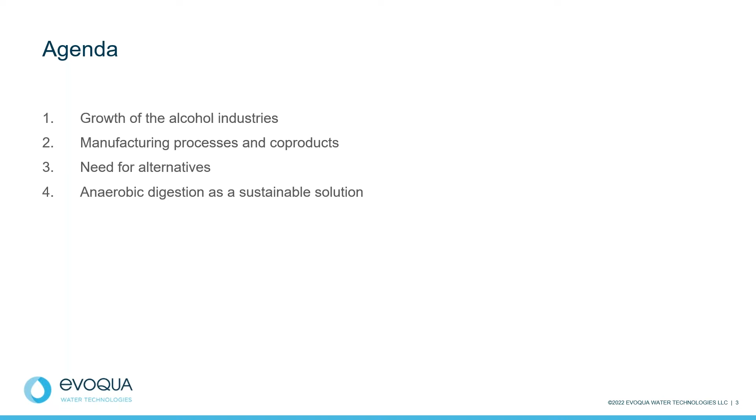So talking about sustainability, we'll jump in here with the need for alternatives. And more specifically, we want to discuss the use of anaerobic digestion as a sustainable solution for handling some of those waste products, waste streams, whether they're solids or liquids.

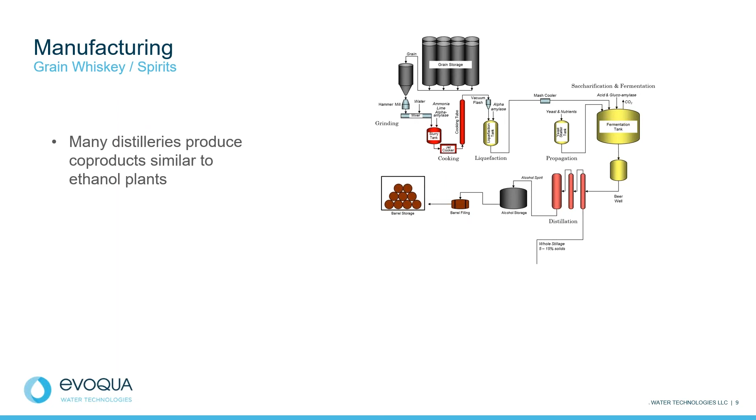But if you're in the middle of a city, it's not always so easy to have a tanker truck fleet to move the stillage out of the city to the farms. And depending on where you're located, sometimes there's not enough demand for this feed ingredient to utilize all the stillage. All right, let's jump to the next slide, please.

So composition wise, if we're looking at the various options for concentration, distillers wet grains or DWG, oftentimes you'll see larger distilleries separating the suspended solids. And what you're going to see is on a dry matter basis, that material, depending on what the cereal grain is, can be up to 45% or more protein content, which is really fantastic as a cattle feed. The problem with distillers' wet grains, because it's a wet product, we're really talking about somewhere between 55 and 65% moisture content.

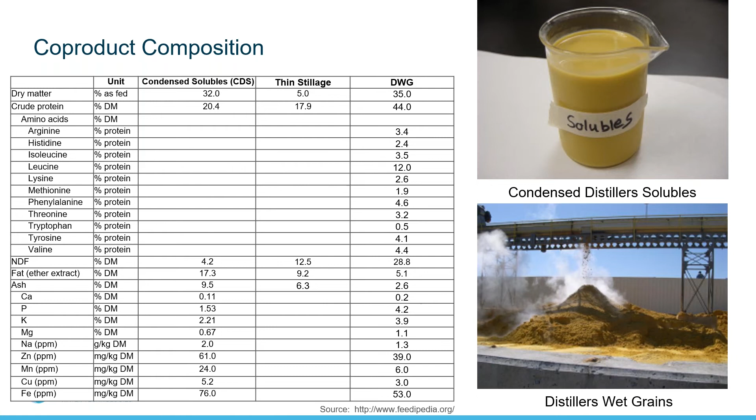It really has a very short shelf life, and most distilleries are going to find that the wet grains won't last for more than a week before they become too moldy for use by animals. But what you're going to notice in this slide, they're going to be really high in neutral detergent fiber, NDF. Here you see almost 29%. Going to be high in leucine, high in some minerals as well. Let's go to the next slide.

If you dry the wet cake, the distiller's wet grains, down, you'll generally produce some type of a distiller's dried grains. It might have solubles or not, the dried dissolved solids. Typically speaking, we're going to see protein concentrations from about 25 to about 35% on a dry basis. We're going to see a fairly high fiber content on a dry basis as well.

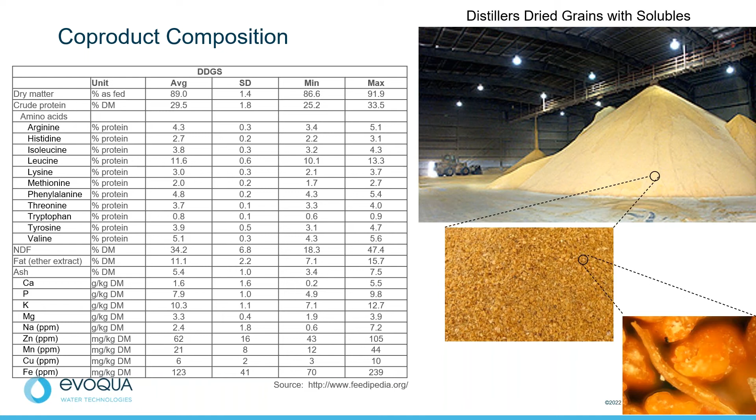And depending on the completion of your fermentation, we'll see generally somewhere between 5 and 30% starch content, depending on your fermentation operations. This has a shelf life that could be anywhere up to a couple of years or more, because generally the moisture content is going to be less than 10%, and so it's shelf stable. Let's go to the next slide, please.

If we think about malt whiskey production, it's a little bit different than your grain-in types of beverage production. So in this case, we have a grain-out fermentation where we mash the grain, we extract as much of the sugar as we can, we send the solubilized sugars into the fermentation, and all of that spent grain then leaves the mash tun as draff.

And sometimes you'll run that through a centrifuge. Sometimes companies won't. They may sell their draff wet, or if they run it through a dryer, they may sell distillers dark grains, in many respects similar to what a grain-in type of fermentation will provide. With the sugar stream, grain-out fermentation, we may have pot ale, we may have spent lees as well. Not all of the fermentation will go to completeness. So there may be some other streams that we have to deal with.

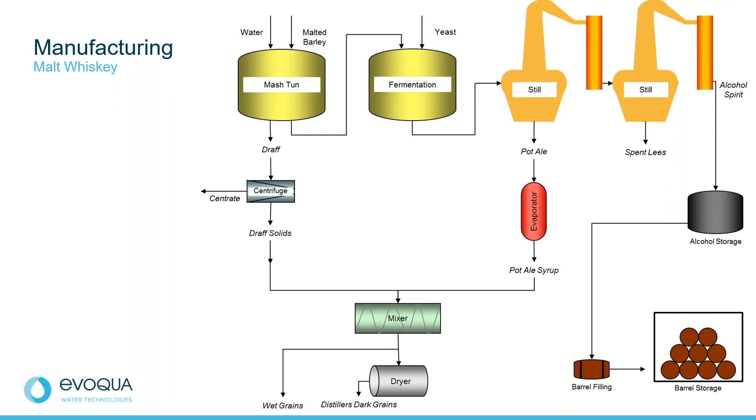And again, what many of the smaller distilleries are doing is not necessarily drying these down into dried grains. That's generally the larger distilleries that do this. Generally, the small and the craft scale distilleries are utilizing the city systems to deal with their wastewater streams.

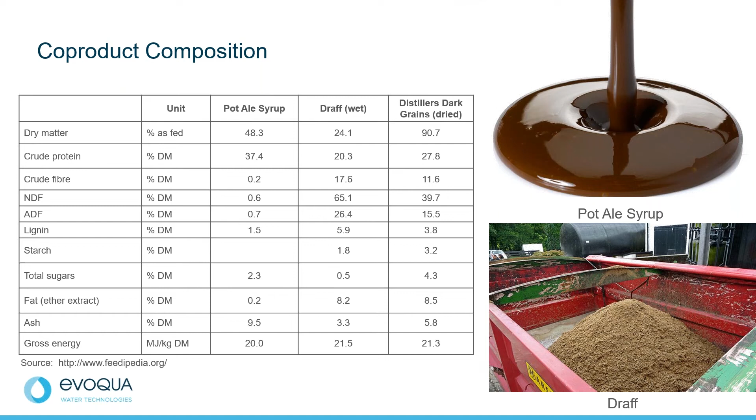Next slide, please. If we look at the composition on a dry basis, what we're going to see is some similarities with the grain-in fermentations. So generally, looking at the draff or the wet grain, similar to DWG, about 20% protein on a dry basis. Distillers dark grains, which are dried, will get a little bit closer to 30%. These will follow and track, in many respects, the cereal grain that you use. If you're using more rye and corn, or if you're using just corn, the nutrients will change just a little bit. So let's go to the next slide, please.

So from a beer processing point of view, in many respects, there's a lot of similarity to a malt whiskey type of production where we do a mashing step. We try to remove as much of the solubilized sugars as we can so we can run those through the fermentation. So the spent grains that are going to be coming out of our lauter tun or a mash tun are going to be very similar in many respects to what we see from a malt whiskey type of production. Again, there may be some lees or some pot ale that we might be removing from fermentation, but not always. So the spent grain is in many respects going to be quite similar to what you'd see from a malt whiskey production. Let's go to the next slide, please.

And if we look at typical composition for brewer spent grains, depending on the scale of operation, the smaller and the medium-sized breweries are typically going to have their byproducts in wet form. Some of the larger breweries have installed dryers and they produce dry spent grains. But on a dry basis, we're really talking anywhere from 20 to over 30% protein.

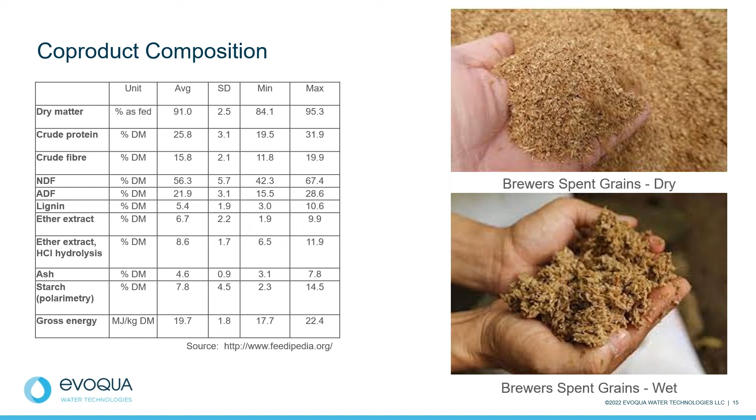So very similar to what you'll see from a malt whiskey type of production, because it follows the same type of sugar extraction process. So the other nutrients, the ash, the lipids, the fiber, those will all track with the type of cereal grain that you're using. Again, depending on the extraction of that sugar from the endosperm of that grain, you may have more or less residual starch left in that spent grain. Next slide, please.

So when we think about the growth of the beverage industry, whether it's spirits or beer, what we're really talking about is growth in byproducts. And I think it's really important to consider the byproduct side when you're talking about sustainability, both the environmental, the economic, as well as the social aspects, the triple bottom line. So if you make an estimation, and this is just a crude estimation, that for every gallon of alcohol that you produce, whether it's beer, whiskey, vodka, somewhere between 8 and 15 gallons of stillage per gallon of alcohol.

What we're seeing really, if you go back a few slides to the growth charts that I showed you, no, sorry, Jose, I didn't mean to go back. From 2012 to 2017, really what we're talking about is a growth of about 42 million liters of spirits in the US, which is essentially the growth of about 420 million liters of stillage and spent grains. So there's a lot of byproducts that our industries need to deal with, and there's no magic bullet.

Separating your solids, drying your solids, sending them to cattle yards, swine and poultry production facilities, those work, and they work very well, especially for the fuel ethanol industry. But you have to have a scale with which you can afford to install the separation and drying equipment. For the craft and the medium scale breweries and distilleries, they don't always have the capital to afford that.

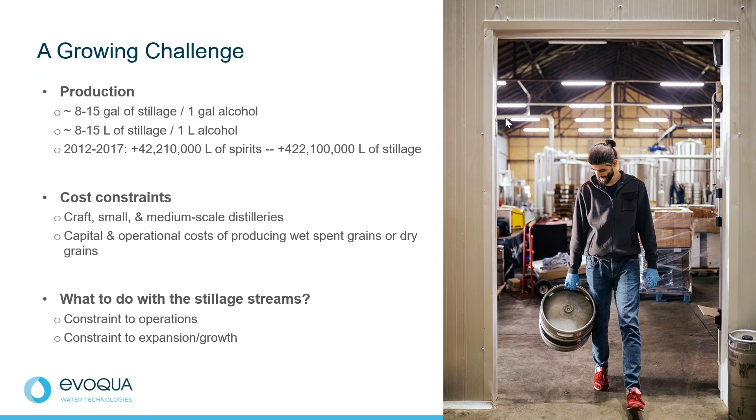So the challenge that we have, especially from a sustainability point of view, how do you deal with these products? Yes, there's a lot of nutrient value, but if you can't afford to install centrifuges and dryers, what do you do? And if the city is no longer allowing you to increase your load to the municipal system, that's going to be a constraint to the growth of your operations. So I'd like to hand it over to Jose to talk about anaerobic digestion as one potential option for breweries and distilleries that may work better for some of the smaller scale companies.

Well, thank you, Kurt, for that discussion. So this is a great way to summarize what's going on in the distillery industry. So on the one hand, you have production of alcohol. On the other hand, you have all those elements that you have to deal with after you've made your alcohol. There's the byproducts, there's the liquid streams, there's the solid streams. And again, the discussion here is how do we do this in a more sustainable fashion? And like Kurt said, we're not talking about just an environmentally sustainable way.

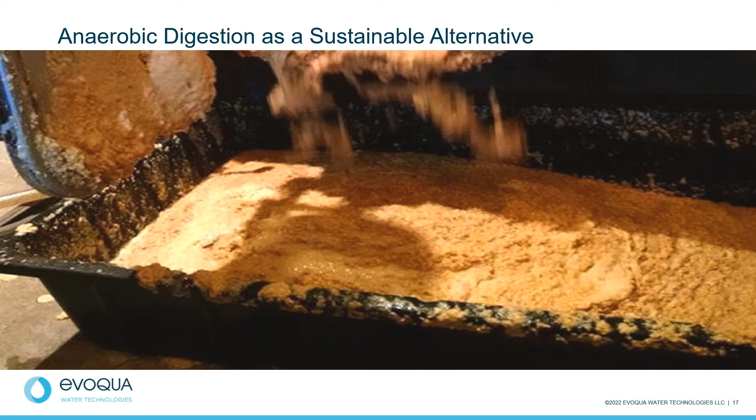We're also talking about the social aspects of it all, the economic aspects of it all. So just to recap here, when we have a distillery type of operation, you're generating an alcoholic spirit from whatever sugar source that you have, depending on the region, depending on what it is that you want to grow. So whether you're making a whiskey or bourbon, you can be making rum from sugarcane molasses, tequila from agave. These are all different sources of sugar that you're using to make this great product, which would be a spirit. But whatever you're using as your source will affect what those co-products or byproducts look like.

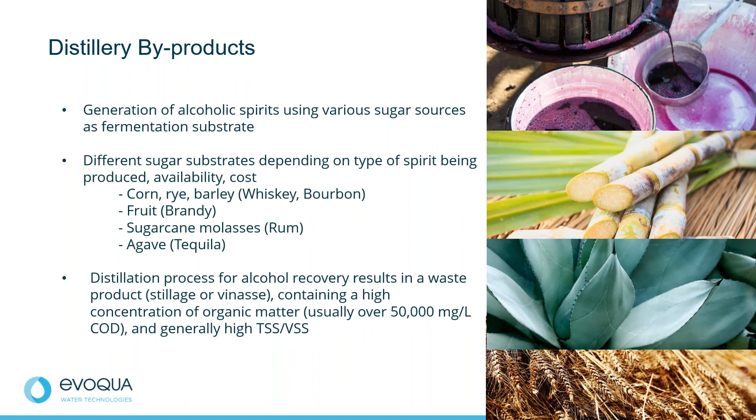Okay. So what does that stillage look like? If you haven't removed the water, if you still have the water and whatever organic matter is still left over after fermentation and distillation, you have a product that has a very high organic content that can be used as food for cattle if you were to dry the product, and again use it as a value-added product for your farmers, for cattle food or piggeries, whatever it is. What we are looking at is, what if those options are not all at your disposal? Then you will have to look at sustainable ways of handling the byproduct.

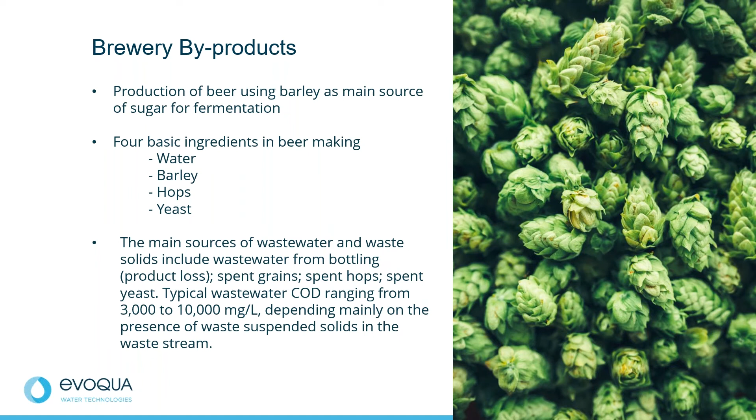Similarly, in the brewery industry, you are taking barley, you're using the soluble sugars out of the barley to make beer, and then you will have various waste products coming out of that process. Okay, so in the brewery industry, since you are not doing the distillation process to separate the alcohol, the waste material coming out of a brewery plant would be a lot weaker in terms of organic strength, but it's still a potential source of food or a potential source of energy if the idea is to take the energy in the form of biogas out of that wastewater.

So again, as Kurt was saying, evaporating that water from the stillage so that you can use it as a dry product is a very energy intensive process. So the larger distilleries might have this already resolved. Some of the smaller or medium-sized distilleries would still have to dispose of that material in a different way. Maybe it's too intensive from a capital point of view and also from an operating cost point of view. Transporting that waste material that's coming out of the stills carries a transportation cost. It carries an environmental cost as well.

But as I was saying earlier, you can look to turn these waste materials into a potential revenue stream. The idea is to do it in the most sustainable fashion that you can. The reason that we're discussing this here with Evoqua is the fact that we can look at taking those waste materials and turning them into biogas as a green source of energy for a lot of these processors. This is a solution that could meet the sustainability objectives for a lot of our customers. You're looking at energy recovery, and you're also looking at independence for your operation in terms of how to generate your own energy, and also not having to depend on third parties, outside parties, to take away those waste materials from you.

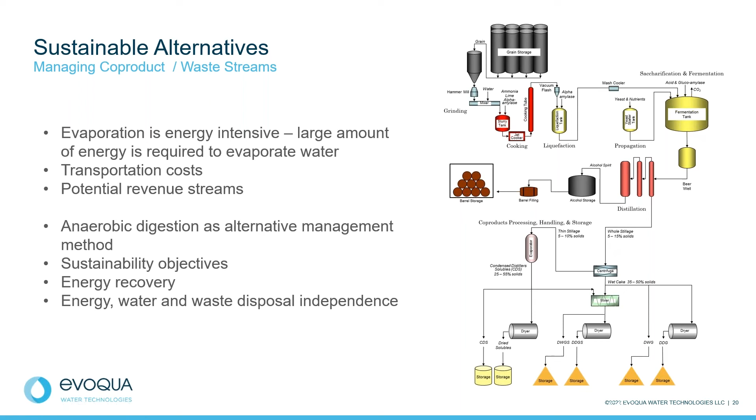So really, the objective of the distillation plant or the producer is to optimize the production of alcohol here. Once you've made the alcohol and are cleaning it, bottling it up, there will be generation of some waste material here. But really what we want to concentrate on in this discussion is, what do you do with what comes out of the bottom of those stills? Similarly, here, if you're making whiskey, you will have those waste streams coming out of the mash tun, but also what comes out of the bottom of the evaporation process.

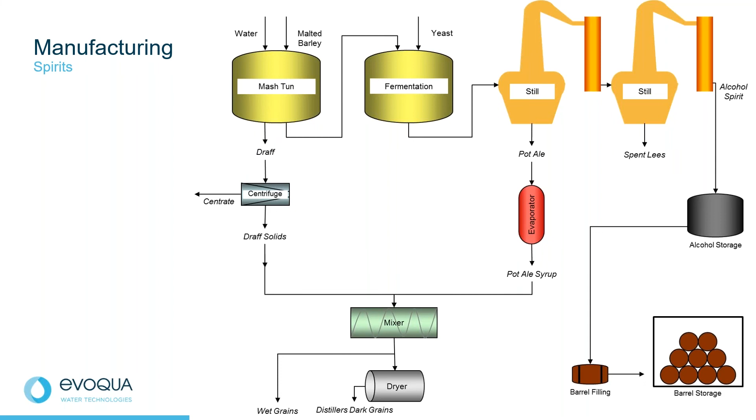So one alternative is to separate and dry, and then you have the solid material that you can get some value out of. Or the alternative that we would like to discuss, for some of our customers it would make more sense to take these two streams and put them into an anaerobic digester that can recover the energy that's still in it. Rather than using it as feed, you're using it as feed to a digester for turning it into biogas.

So the brewing industry can be quite similar as well. So this is Kurt's graph. What you see is spent grains that usually are used as cattle feed, and then at the bottom you have the brewing process, and the bottling process will generate a more liquid stream with a lot of the organics in soluble form. But let's not forget that you also have waste yeast, so spent yeast, and spent hops that are also a byproduct from the brewing industry, and our idea is to always look for sustainable ways of handling that material.

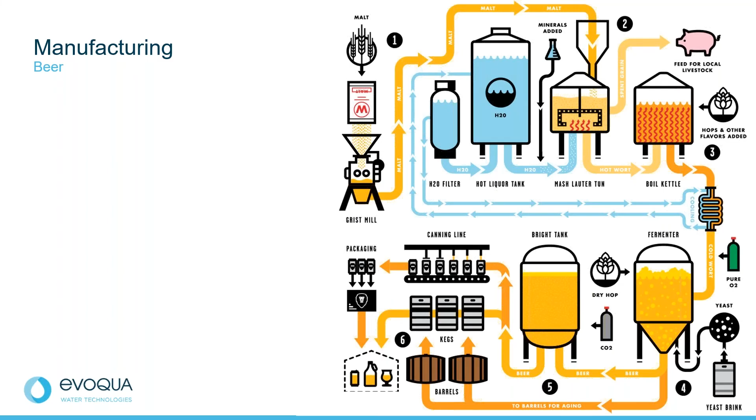So I have a couple of examples of case studies of where we've been able to do this, looking at sustainable ways of handling these waste materials. So a couple of slides on this application that we did for New Belgium Brewery at a plant in Asheville, North Carolina. So this was a brand new operation that was being built in North Carolina. As you know, New Belgium came out of Colorado, but they found a lot of success, and they built a brand new facility in North Carolina.

But of course, you're within the city limits. You have limited space to do your brewing and your wastewater treatment. And the company was looking for a good, sustainable way of handling the waste stream. They had resolved the issue with what to do with spent grains, but they were looking for sustainable alternatives of how to handle the spent hops and the spent yeast. So in this case, what we came up with was a solution that would handle both the liquid stream, the processed wastewater from the brewing operation, but combining that with the waste streams from yeast and hops.

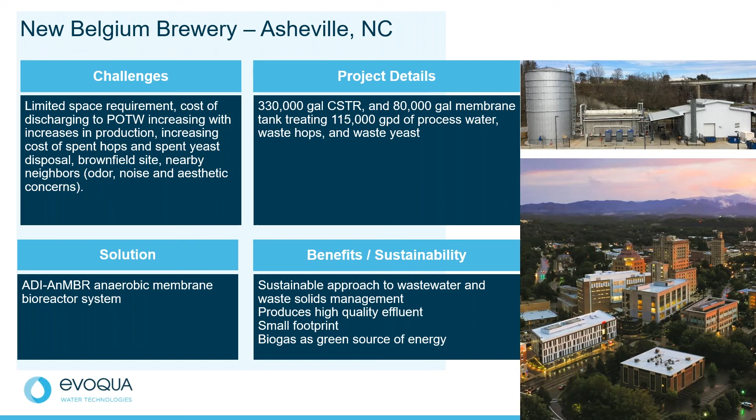The solution is an anaerobic membrane bioreactor that can convert over 99% of the BOD of the organic matter in that wastewater and turn that into biogas. So this is a very sustainable approach to the management of both the liquid and solid stream. The effluent from our reactor is very high quality, so it can go to the city sewer without paying very high surcharges, because most of the organic matter has been removed from it. And of course, we're recovering the biogas and utilizing it in a form of energy recycling. So it's a sustainable way of taking that energy out of the beer wastewater and turning it into a source of green energy.

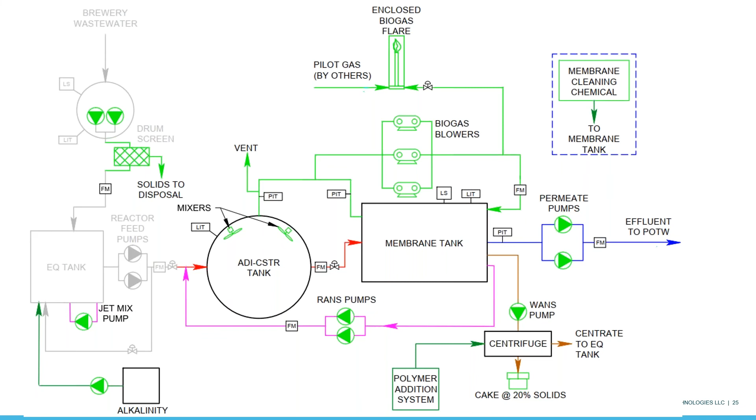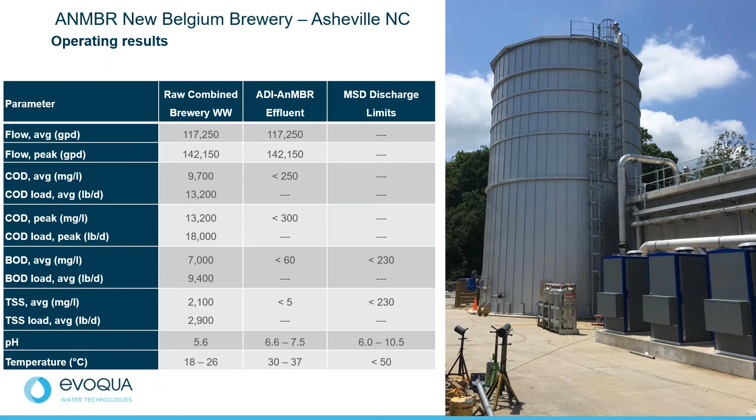So very quickly, some operating results. You can see that with wastewater with a COD of almost 10,000 milligrams per liter, you have over 98% removal of that COD. So all of that sugar and protein that's still left in the wastewater is being converted to biogas, and very little in terms of waste solids coming out of the plant. This is a very stable process. I think you don't need to get into the details here, but COD as a measure of organic load is very variable from a typical brewing operation. And what you have is a very stable organic concentration in the effluent from the anaerobic reactor going out to city sewer. So again, all of that COD that you see here on the blue dots is being converted to biogas and utilized rather than being sent out for the city to treat at a much higher cost.

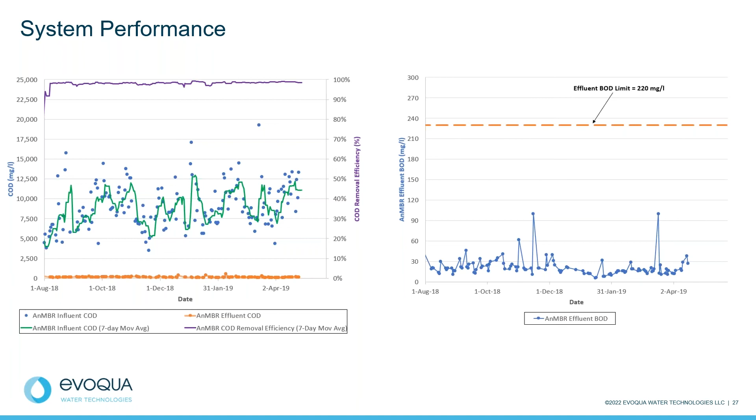So just to summarize, this is a green solution for treating wastewater from a brewing operation. The anaerobic membrane bioreactor was a great advancement in the technology, and it consistently maintains very high performance year after year, month after month. The waste solids that we would otherwise have to dry and transport and find somebody to take away from you are instead being kept internally to the plant and being converted to biogas. So that's energy that can stay within the production plant.

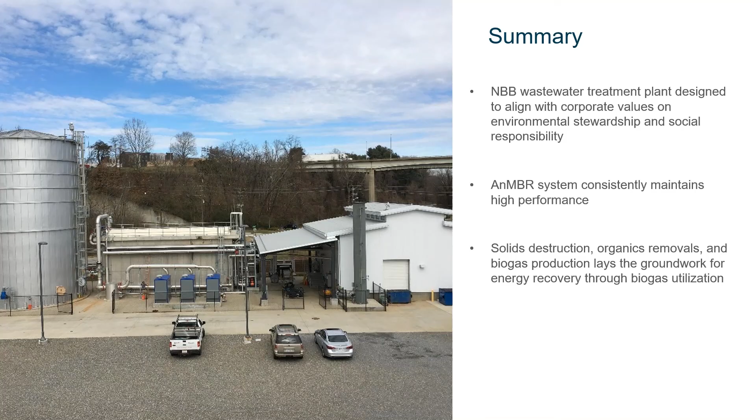And very important here to note is that you do not need to separate the solids and try to find somebody to take the solids from the plant for some kind of use. The circuit is closed here so that both the solids and the soluble organic matter are being digested and taken into biogas. The system's been running for maybe a year and a half, and it's obviously meeting the customer's sustainability and environmental stewardship objectives.

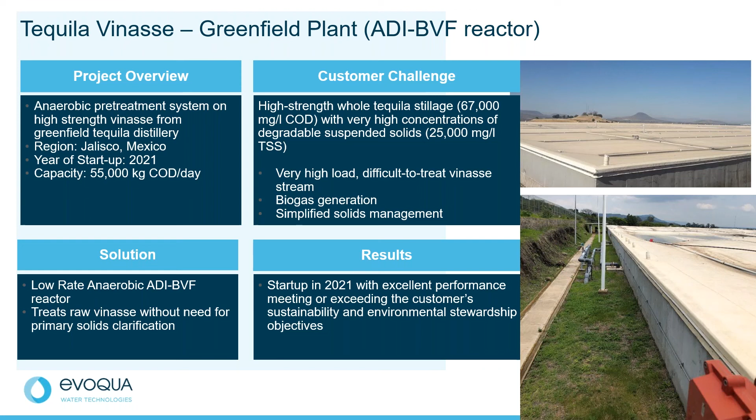In the case of the sugarcane molasses distilleries, if you digest the whole stillage in an anaerobic reactor, you're creating enough energy in the form of biogas that it can make the process of distillation self-sufficient. So there's enough sugar and protein and other organic matter left in the stillage that if you digest it and convert to biogas, you can actually run the distillation process. There's enough green energy in there. So self-sufficiency, sustainability are the key drivers for projects like this that we've done over the years.